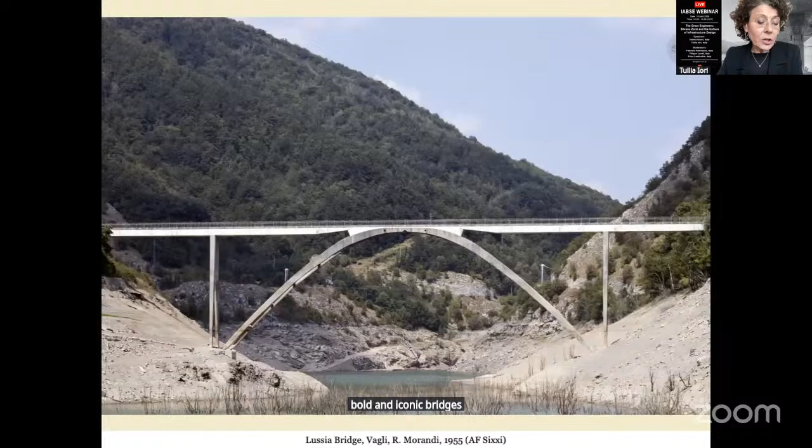At the beginning of the 1960s, the Italian School of Engineering was at the height of its success. Represented by designers such as Pier Luigi Nervi and Riccardo Morandi, it was recognized worldwide as a benchmark. Nervi's domes, classically beautiful, yet built with just a few centimeters of ferrocement, or Morandi's bold and iconic bridges, were featured in international technical journals and showcased in the famous 1964 New York exhibition dedicated to 20th century engineering, which was full of Italian works.

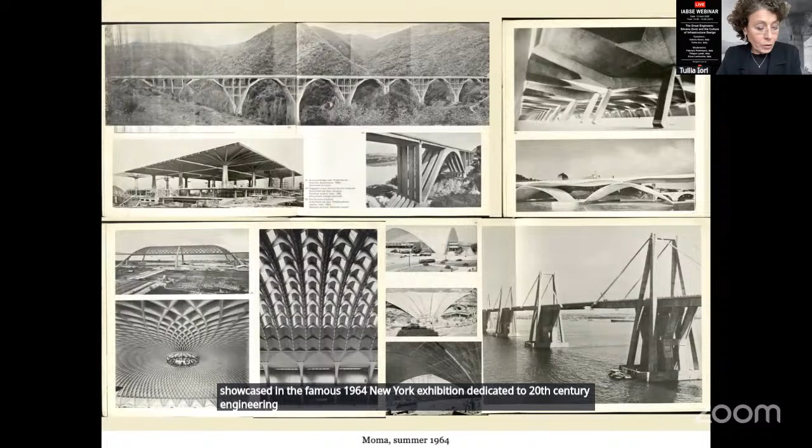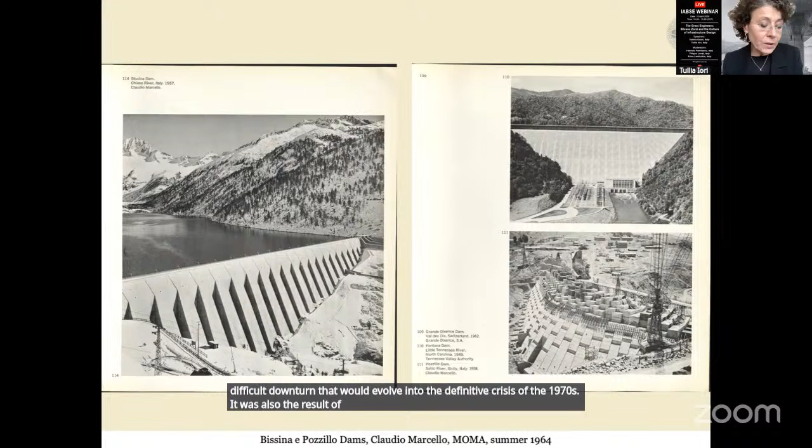After the mid-60s, however, this school disappeared from the radar. This was partly a consequence of the sudden change in Italy's productive conditions. From the extraordinary growth of the economic boom, the country fell into a difficult downturn that would evolve into the definitive crisis of the 1970s. It was also the result of a broader transformation in the civil engineering sector: rising labor costs, the advent of computing, changes in calculation tools, and increasing specialization led to the extinction of the classical figure of the large structure designer, which had survived in Italy's proto-industrial context.

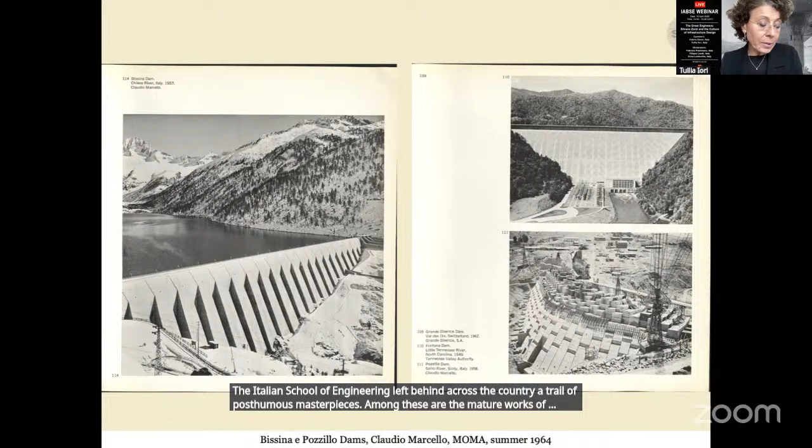From that moment on, even in Italy, bridges and large span structures would no longer be the individual work of a single author, but rather the depersonalized product of multidisciplinary teams and standardized construction systems. Yet, even in its rapid and irreversible decline, the Italian School of Engineering left behind across the country a trail of posthumous masterpieces. Among these are the mature works of Silvano Zorzi, who, after playing a leading role in the epic years of post-war reconstruction, remained one of the few to resist the extinction.

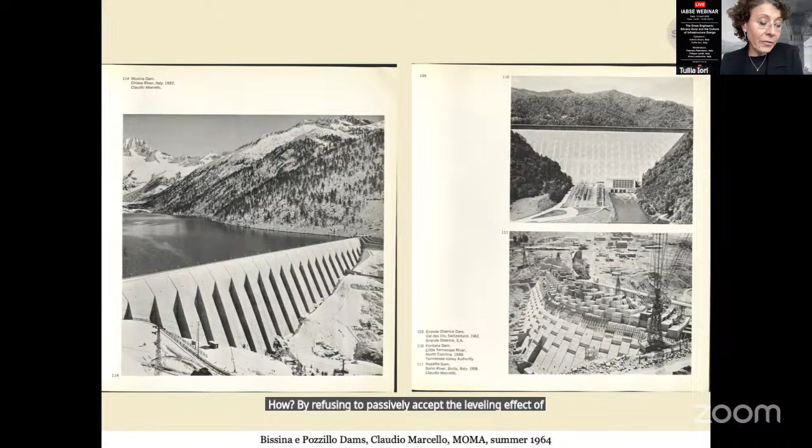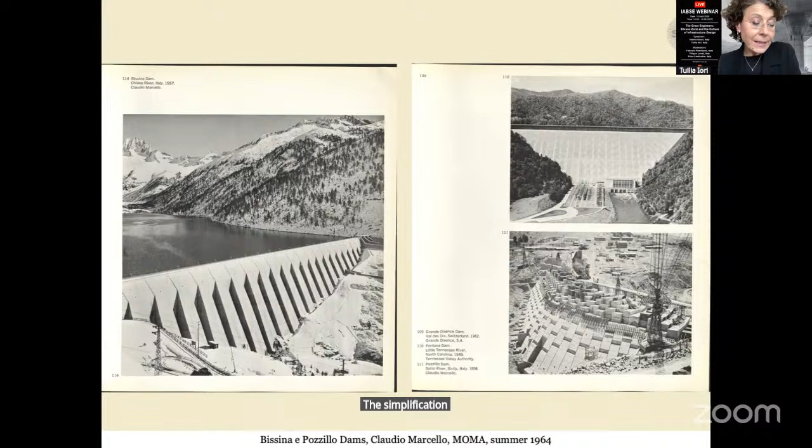How? By refusing to passively accept the leveling effect of specialization and prefabrication, by reworking innovative construction systems for Italian building sites, and by redeeming the simplification of structural schemes imposed by the changing production panorama through the quality of design. It was a kind of utopia, yet one capable of generating structural architectures of extraordinary quality.

Silvano Zorzi was one of the protagonists of 20th century Italian engineering alongside Pier Luigi Nervi, Morandi and Musmeci. A leading expert in prestressed reinforced concrete, he left behind a remarkable legacy of beautiful bridges throughout Italy. Zorzi was born in 1921. Nervi had been born 30 years earlier and Morandi nearly 20. These differences matter.

Zorzi worked entirely in the post-war period, actively participated in reconstruction, and rose to prominence during the economic boom. When the crisis arrived, he had to confront it directly. He was still young, and while the older engineers leveraged their careers abroad, Zorzi had to find a way to continue designing his masterpieces within Italy.

This masterpiece was created in a rapidly changing world of labor. At the beginning of his career, construction sites were full of workers who were inexpensive and needed employment. Public works also served to combat unemployment. These were labor-intensive sites with little machinery or technological equipment.

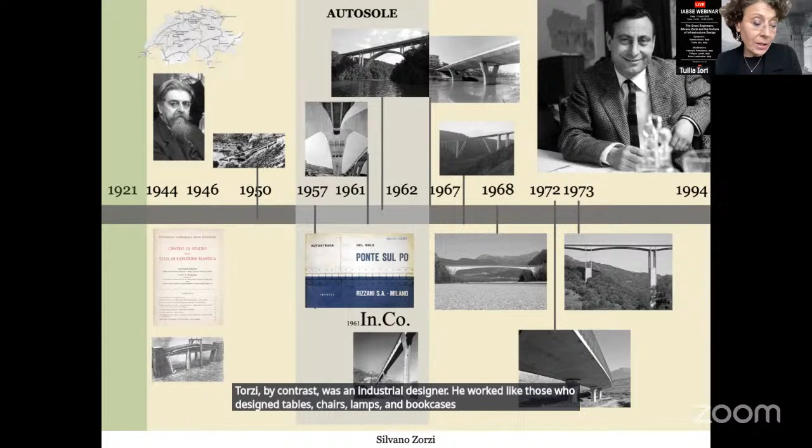Zorzi, by contrast, was an industrial designer. He worked like those who design tables, chairs, lamps, and bookcases for industrial production. And this is not surprising. A bridge is more like a table than a house. It's a functional object. Zorzi is a structural designer of Made in Italy, part of that legendary group of industrial designers who from Milan in the 70s rose to global preeminence.

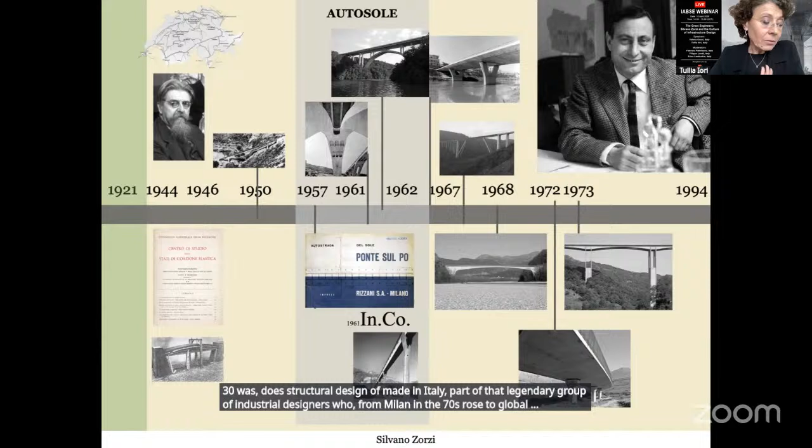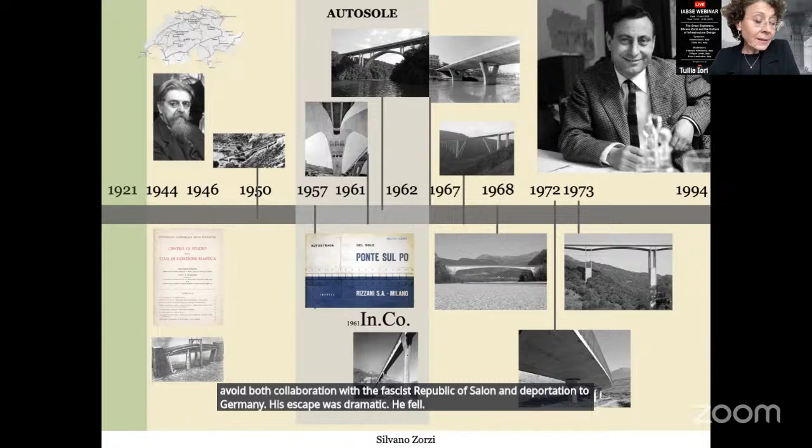Zorzi's beginnings were not easy. In 1939, he enrolled in engineering at the University of Padua, but with the outbreak of World War II, he was forced to abandon his studies. After the armistice of September 8, 1943, he fled to Switzerland to avoid both collaboration with the Fascist Republic of Salò and deportation to Germany. His escape was dramatic. He fell into a ravine, contracted septicemia, but eventually managed to cross the border.

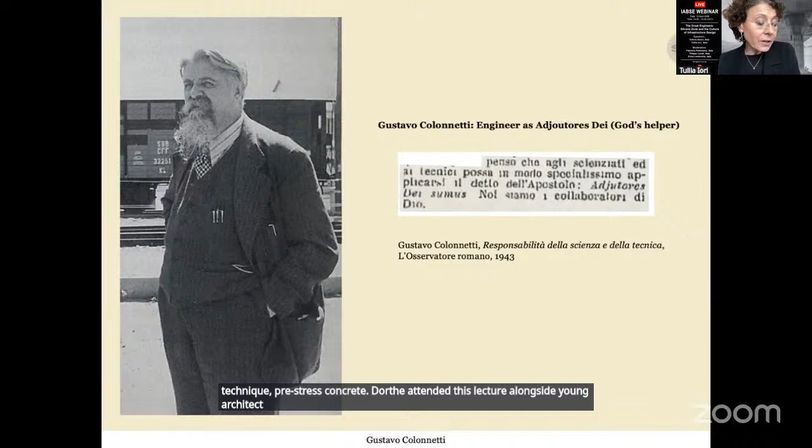In exile, a decisive encounter changed his life. He met Gustavo Colonnetti, also in Switzerland, a renowned anti-fascist and professor of structural mechanics at the Politecnico of Turin. Colonnetti organized university internment camps for refugee students, where he personally taught engineering courses focusing on an innovative technique, pre-stressed concrete. Zorzi attended these lectures alongside young architects and future leading figures in the Milanese industrial design world, such as Vico Magistretti and Angelo Mangiarotti, as well as Ernesto Nathan Rogers and Aldo Favini. They instilled in him a passion for the design of functional objects.

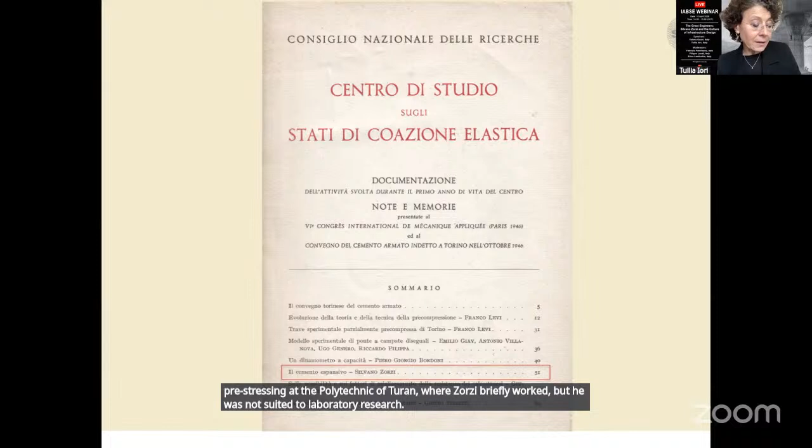Zorzi completed his exams in Switzerland, later recognized by the University of Padua as if he was in Erasmus. After the war, Colonnetti became president of the National Research Council and founded a research center on pre-stressing at the Politecnico of Turin, where Zorzi briefly worked. But he was not suited to laboratory research. He soon left to dedicate himself to bridge design. This Swiss experience shaped him permanently. Pre-stressed concrete and industrial design became the foundation of his thinking.

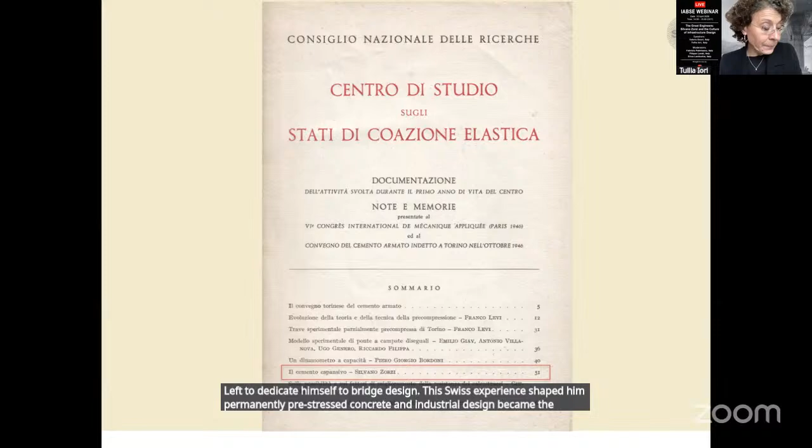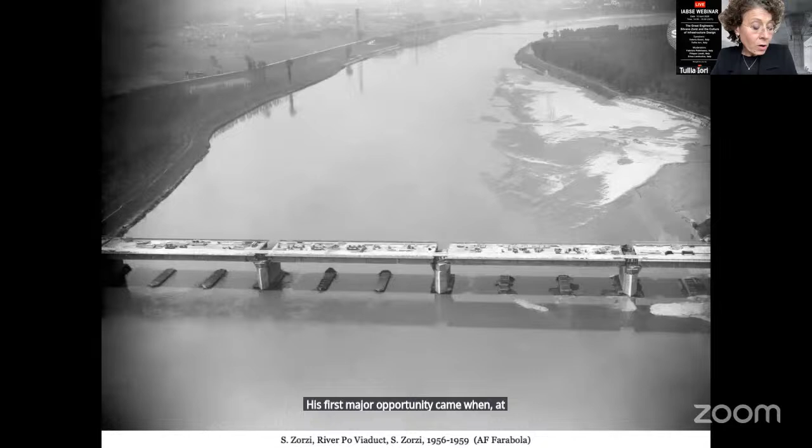Already in 1950, he designed one of the first pre-stressed concrete bridges in the world for the Mucone hydroelectric plant in Calabria. Shortly afterward, he opened his own design firm in Milan, later named INCO, Ingegneri Consulenti, Consultant Engineers. His first major opportunity came when, at age 35, he won the competition for a key bridge on the most important highway in Italy, the Autostrada del Sole, the Sun Highway. The bridge was over the Po River at Piacenza, completed in 1959. The bridge is a very simple structure, 16 pre-stressed concrete beams, simply supported on piers spaced 75 meters apart.

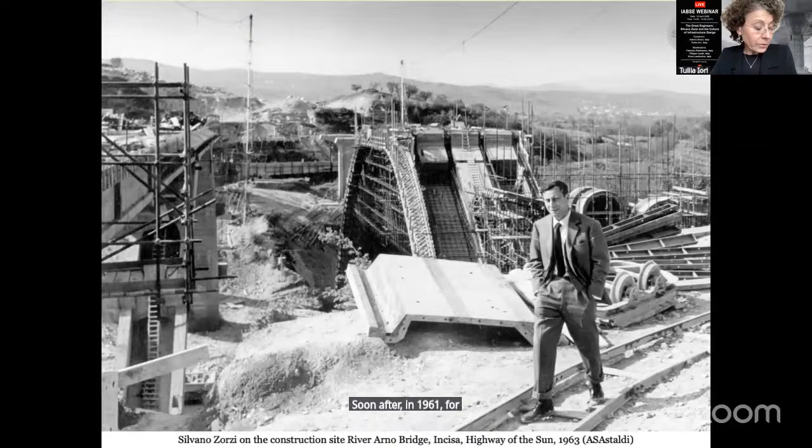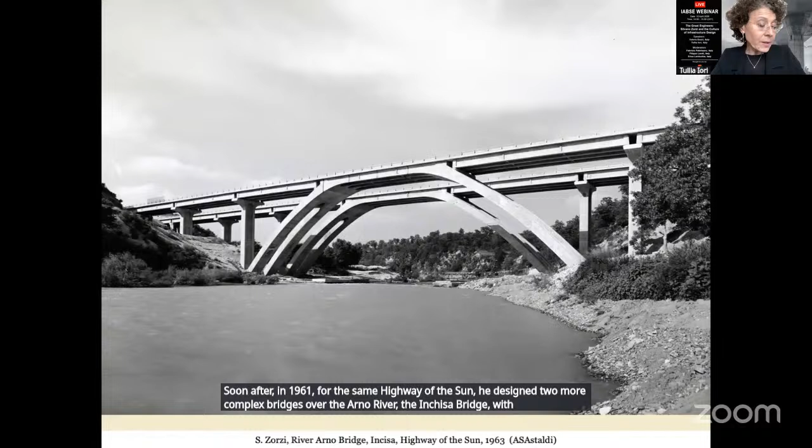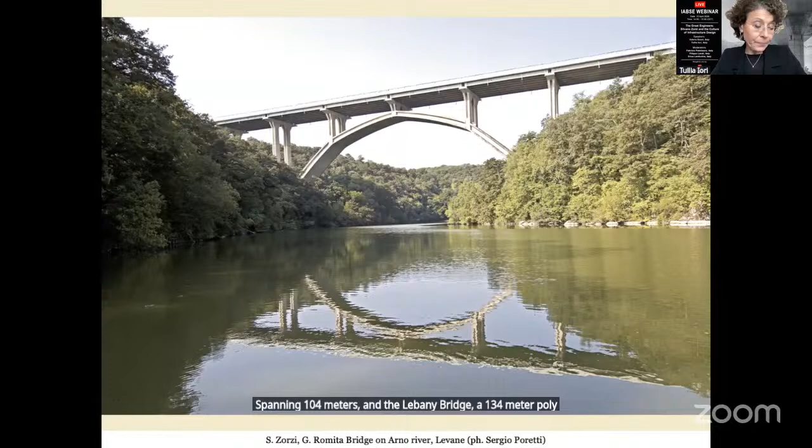Soon after, in 1961, for the same Highway of the Sun, he designed two more complex bridges over the Arno River, the Incisa Bridge, with twin pre-stressed concrete arch portals spanning 104 meters, and the Levane Bridge, a 134-meter polygonal arch, both built with a tubular scaffolding called Innocenti scaffolding.

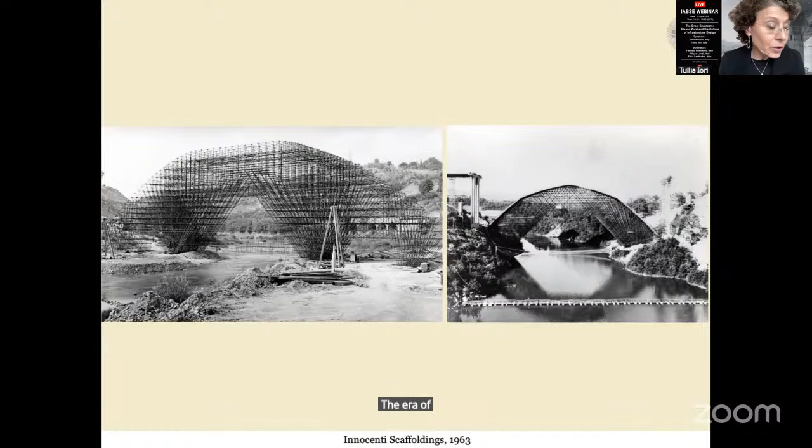The era of large arch bridges in Italy ended after the completion of the Highway of the Sun. After 1964, no such bridges were built for decades. New seismic regulations discouraged trussed structures like arches. Landscape authorities considered them too intrusive, and the cost of temporary scaffolding had become prohibitive. A new type of viaduct emerged, long straight decks supported by many tall piers, forming an abstract, almost invisible line in the sky. Zorzi initially, in fact, continued to design unique bridges.

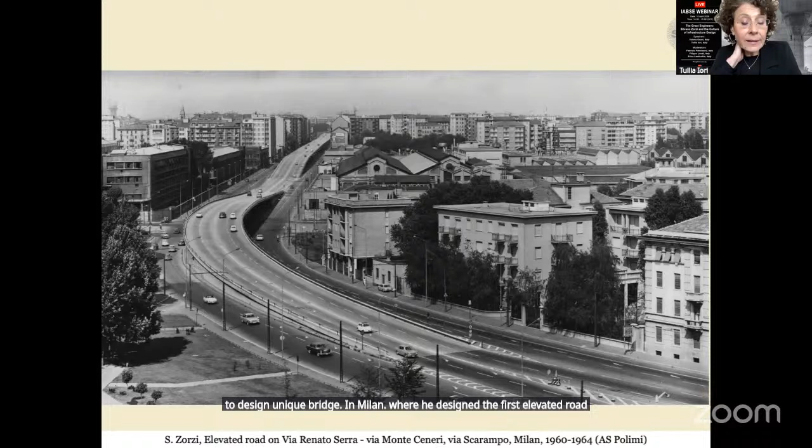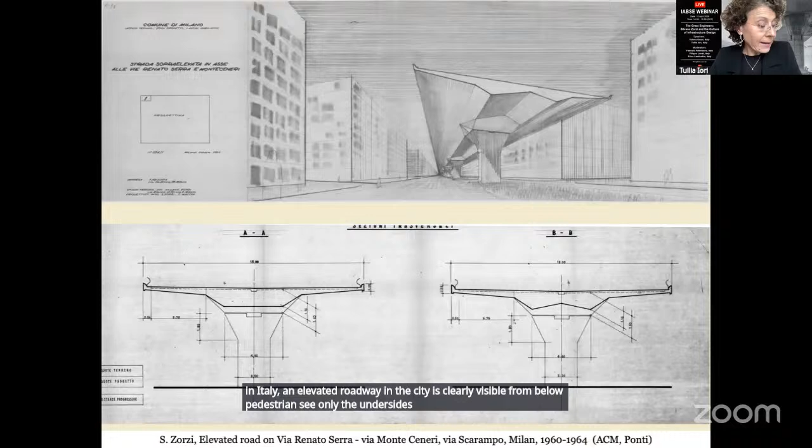In Milan, he designed the first elevated roadway in Italy. An elevated roadway in the city, he said, is clearly visible from below. Pedestrians see only the underside of the deck. Therefore, this underside must be carefully designed because it effectively becomes a kind of canopy for those walking beneath it.

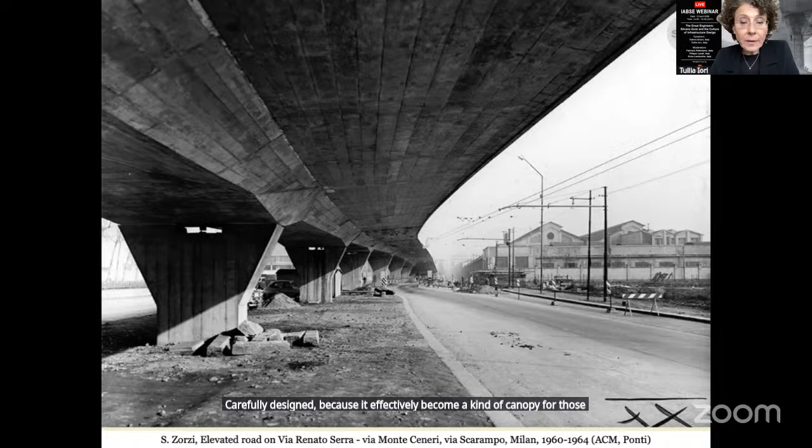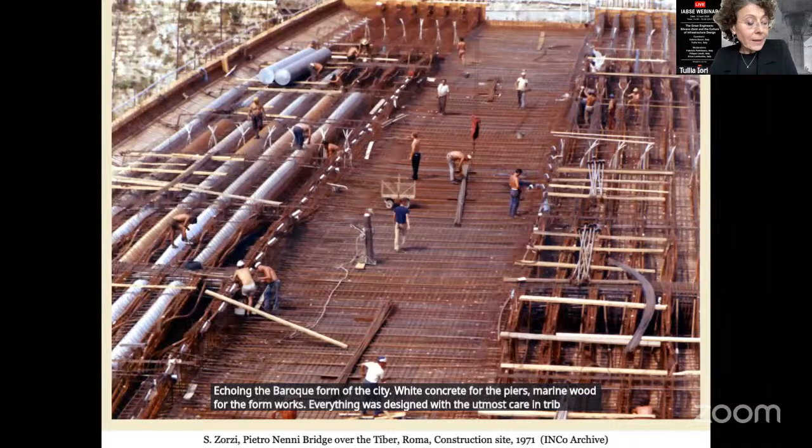In Rome, he designed the bridge carrying the metro line over the Tiber near Piazza del Popolo, completed in 1972. Slender bifurcated piers support a gently curved deck, echoing the Baroque form of the city. White concrete for the piers, marine wood for the formworks. Everything was designed with the utmost care in tribute to the capital and its historic river.

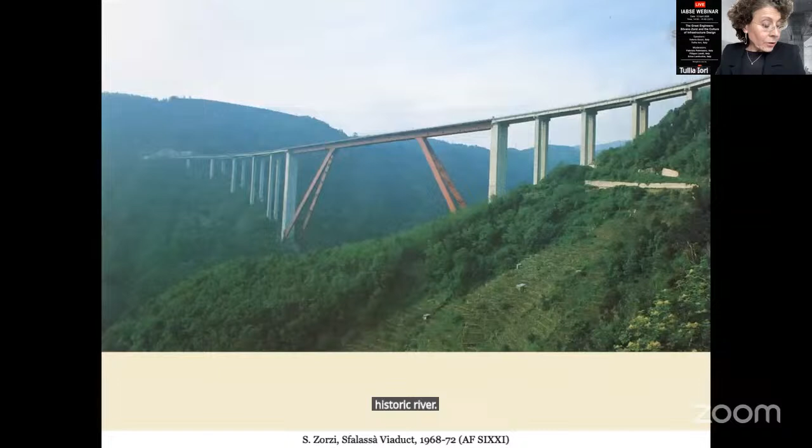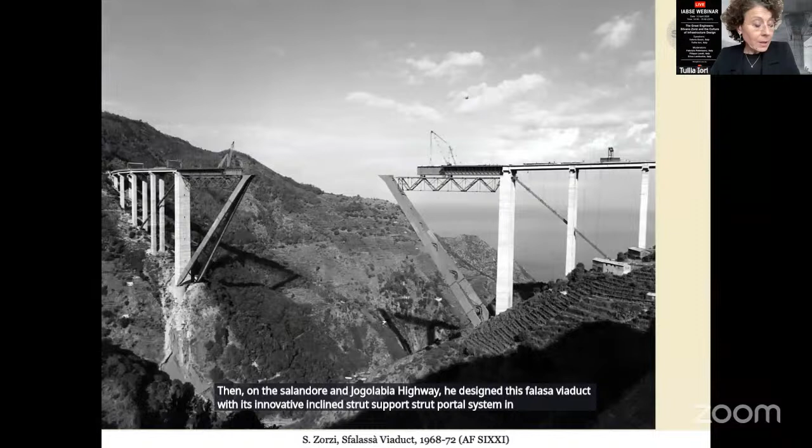On the Salerno-Reggio Calabria highway, he designed the Sfalassà viaduct with its innovative inclined strut portal system in steel. The struts were first constructed vertically and then rotated into position on site using a mechanical system. In this way, temporary supports were not required.

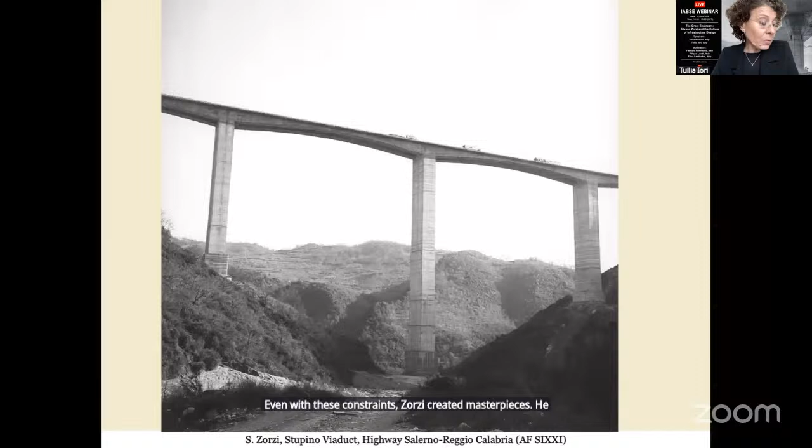But eventually, he too adopted the new typology of bridge: long, straight decks supported by many tall piers. Even with these constraints, Zorzi created masterpieces. He rationalized construction without abandoning cast-in-place concrete. He disliked prefabrication and instead invented a machine-site moving construction system that advanced along the bridge.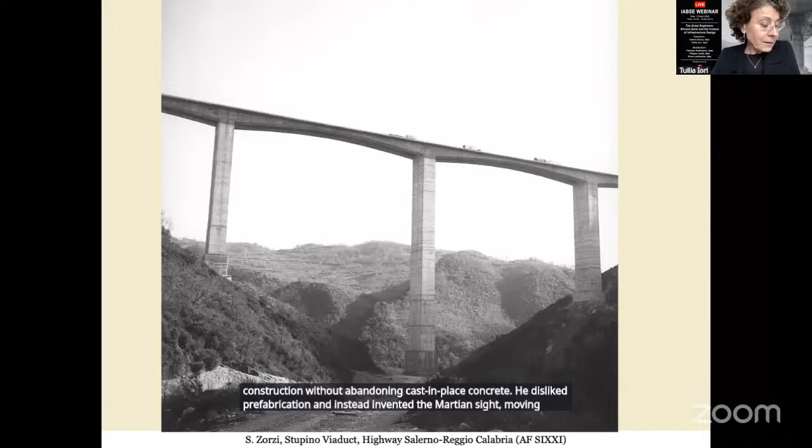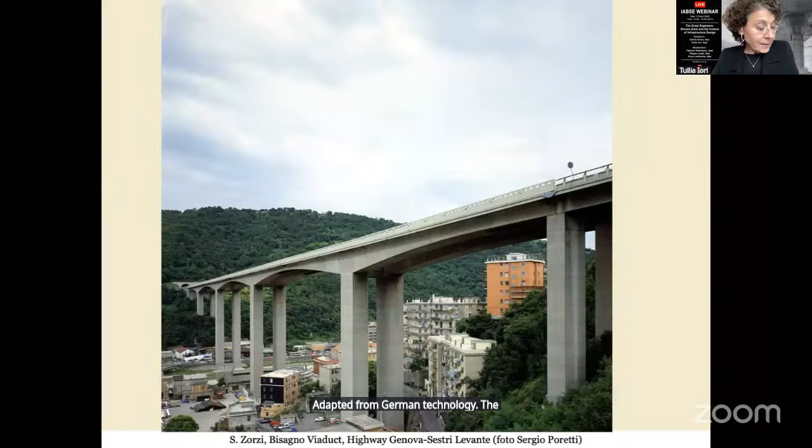He introduced two key machines in Italy adapted from German technology. The first is the self-launching centering system, which Valeria Gozzi will describe in detail. Using this machine, Zorzi built very long viaducts, such as the Parchi Viaduct east of Milan, which is a very beautiful viaduct, now a little bit transformed.

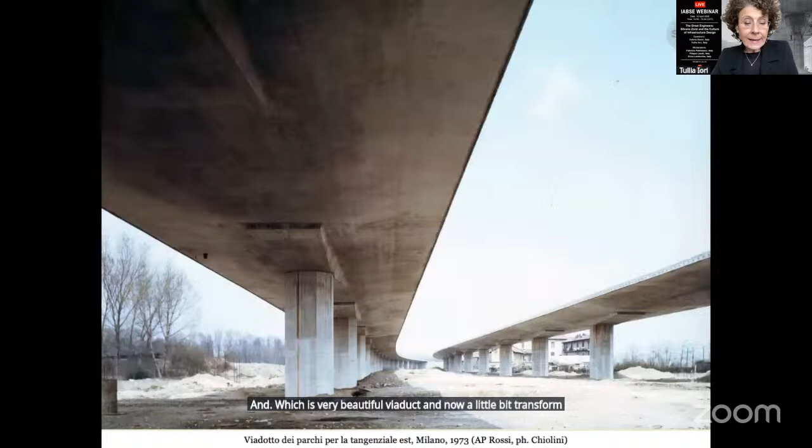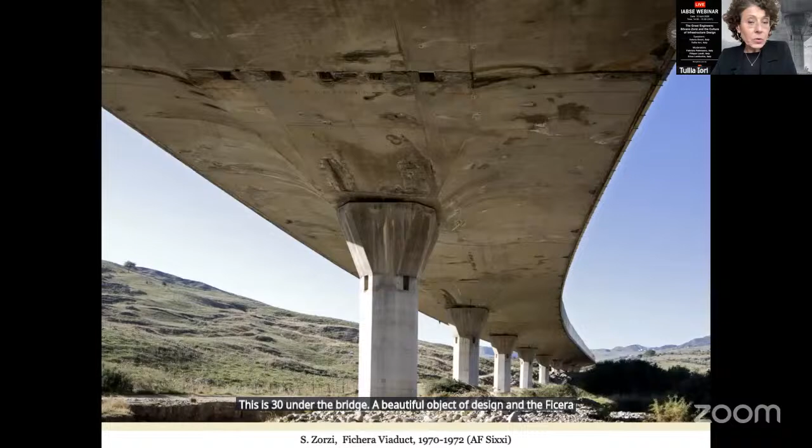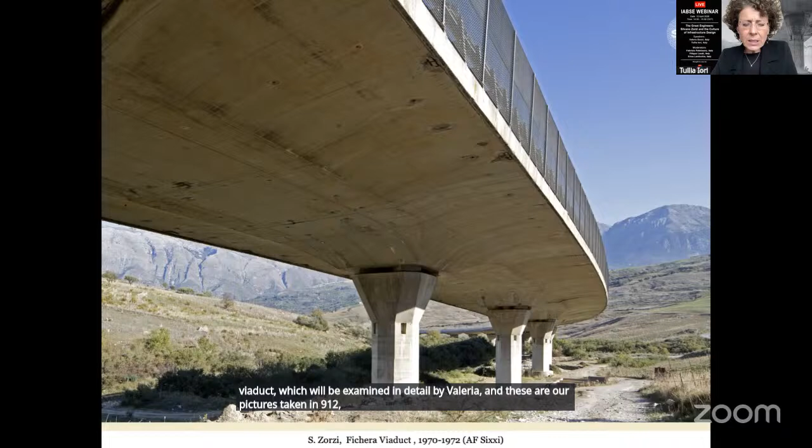This is Zorzi under the bridge, a beautiful object of design, and the Fichera Viaduct, which will be examined in detail by Valeria. And these are our pictures taken in 2015.

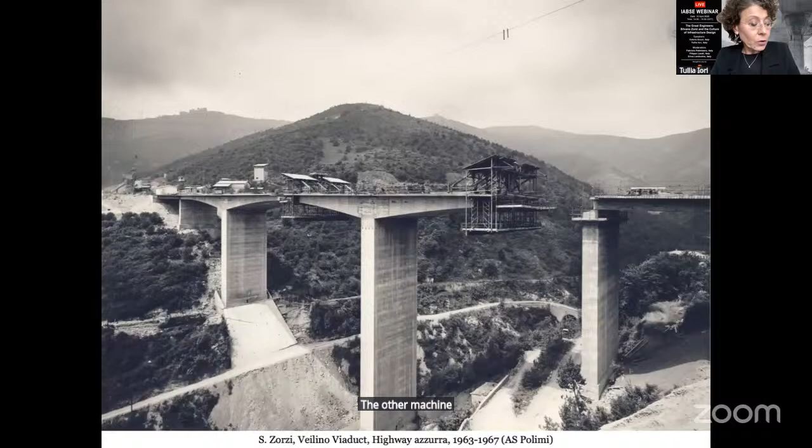The other machine that Zorzi introduced to Italy is the movable form traveller for incremental and step-by-step construction. This machine was used to build the viaduct starting from the top of the pier and proceeding in cantilever. The device extended outward, allowing construction of a deck segment about 4 meters long, also in cantilever. To avoid deforming the pier, the deck was built symmetrically on both sides. Construction advanced little by little until the two cantilevers eventually met.

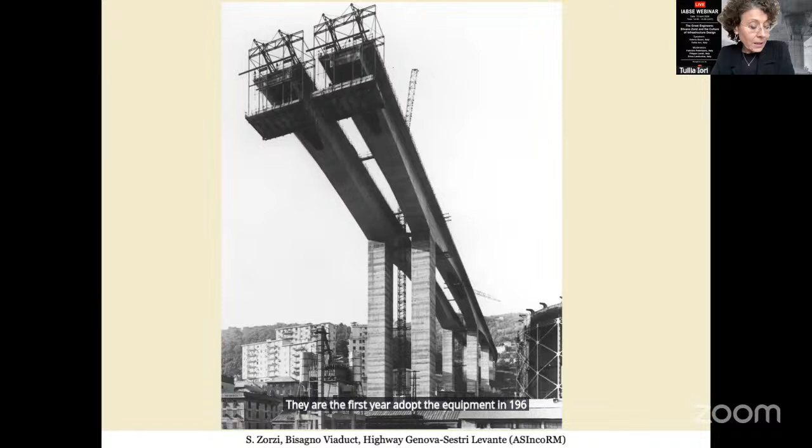Zorzi first adopted the equipment in 1963 for a series of viaducts along the Blue Highway, the Autostrada Azzurra, in Liguria from Genoa to Rapallo. Zorzi then designed the bridge over the Tagliamento River at Pinzano, built by the Rizzani Company.

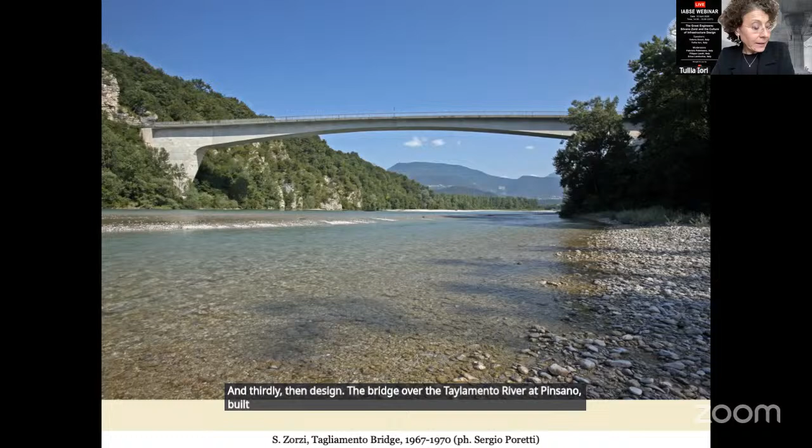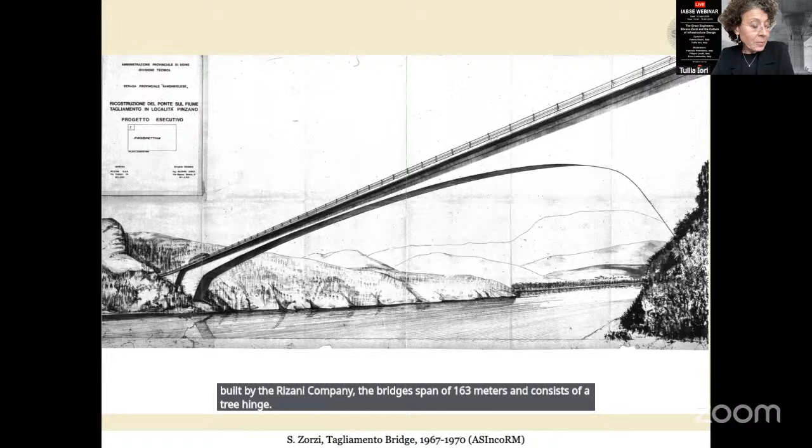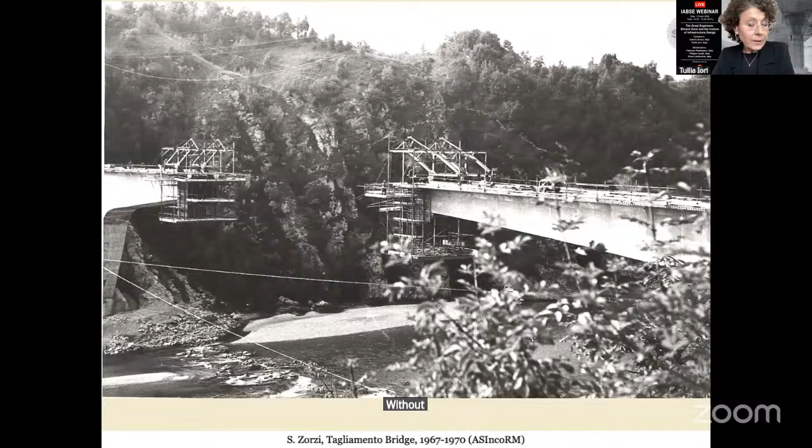The bridge has a span of 163 meters and consists of a 3-hinge portal frame in pre-stressed reinforced concrete. The structure was built in cantilever from both banks. The hinges at the abutments were temporarily locked by inserting deep anchor rods into the rock. Segment by segment, the two cantilevers advanced until they met at the crown without bending, thanks to temporary pre-stressing.

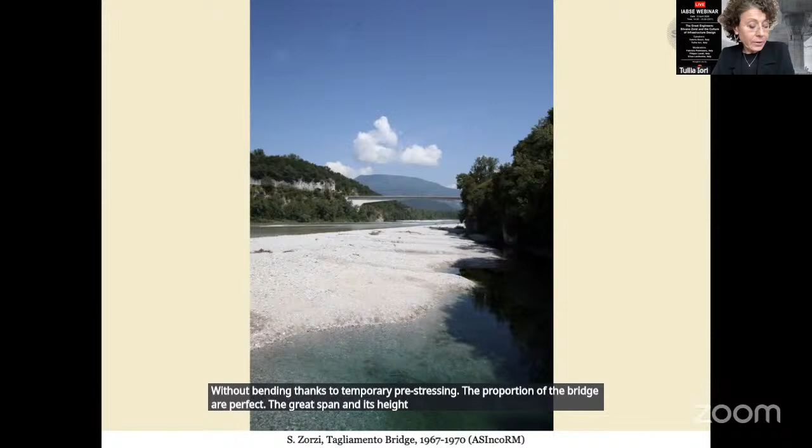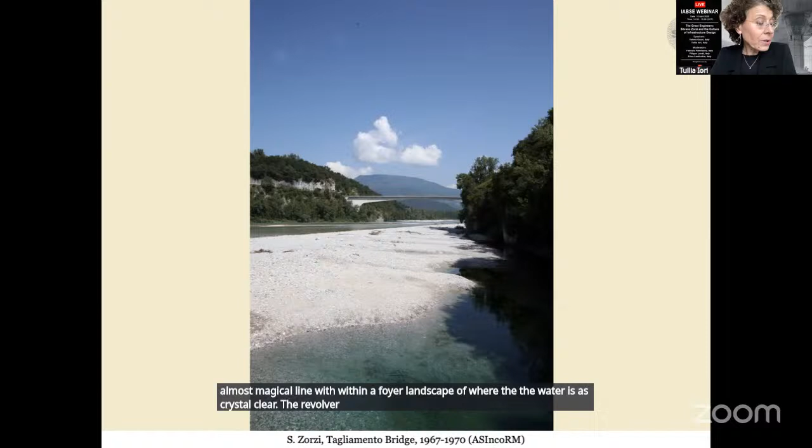The proportions of the bridge are perfect. The great span and its height above the water detach the structure from any direct relationship with human scale. The bridge appears as a slender, almost magical line within a fairy tale landscape where the water is crystal clear, the river has a pinkish hue, and the Dolomites rise in the background.

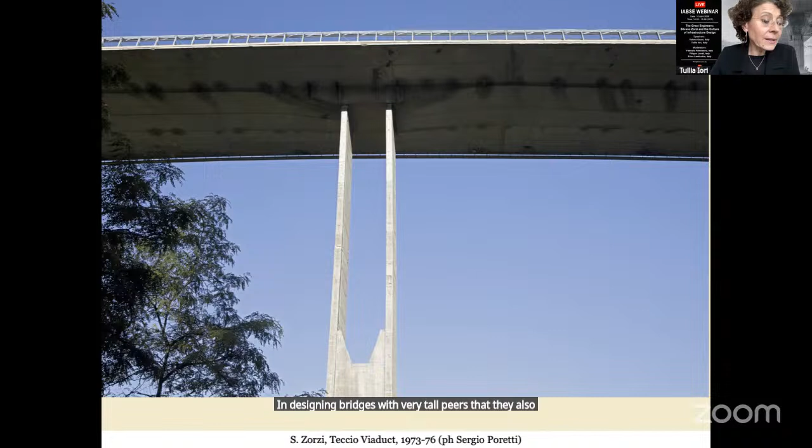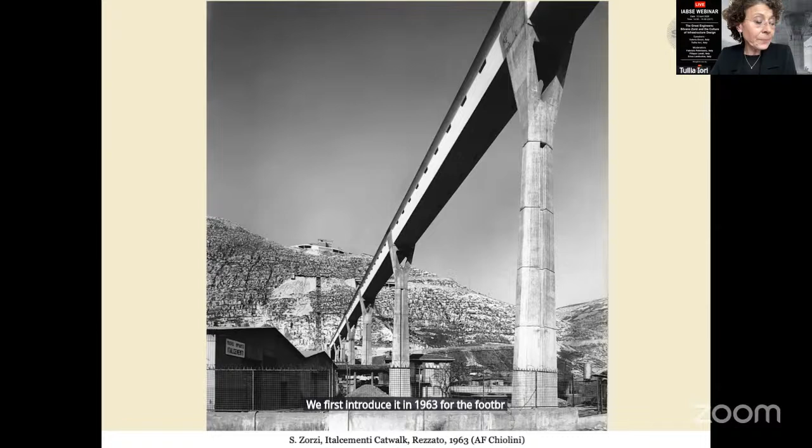In designing bridges with very tall piers, Zorzi also developed an original structural solution, the tuning fork piers. He first introduced it in 1963 for the footbridge at the Italcementi plant in Rezzato. It's not really a footbridge, but a bridge for technical things.

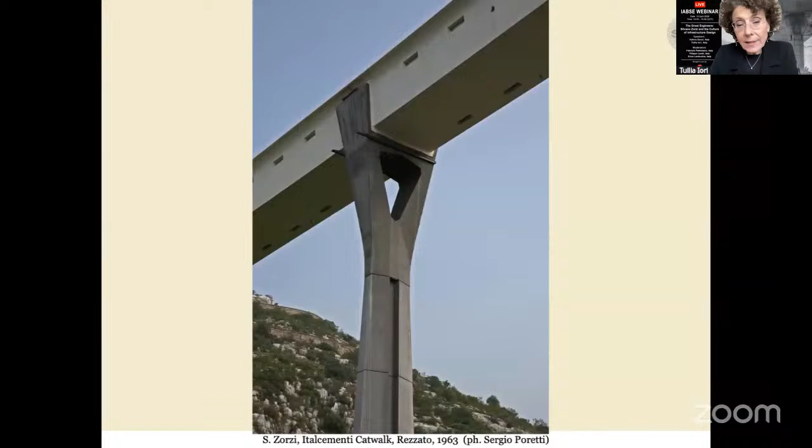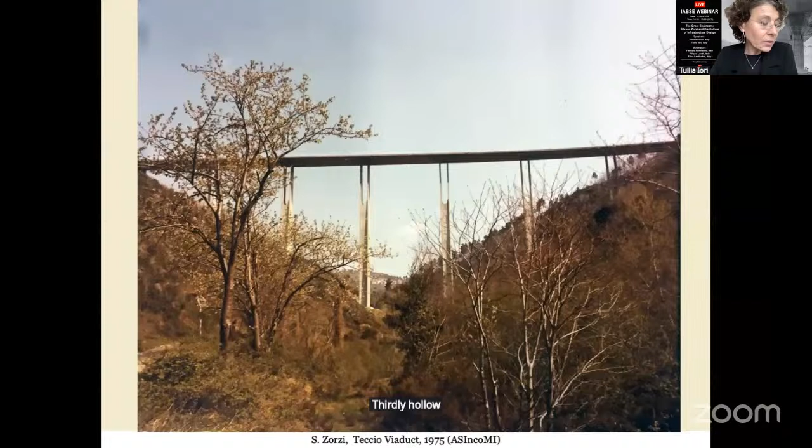This is another industrial design object, later refined in the Gorzexio and Teccio viaducts in Liguria. Zorzi hollowed out the top of the piers, leaving only two parallel blades. The piers resemble a tuning fork.

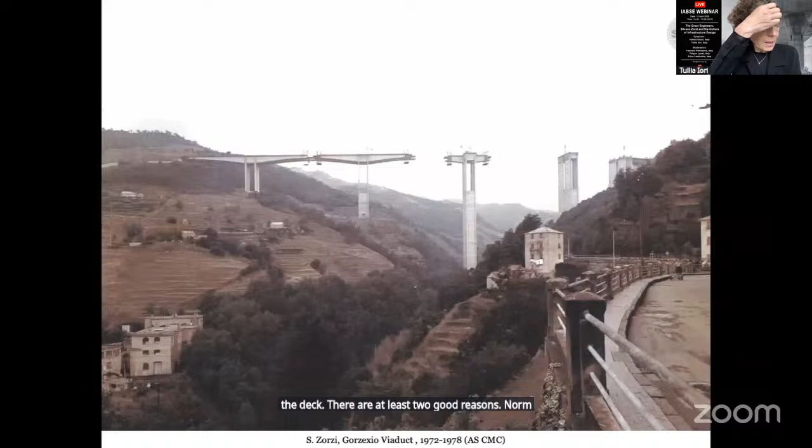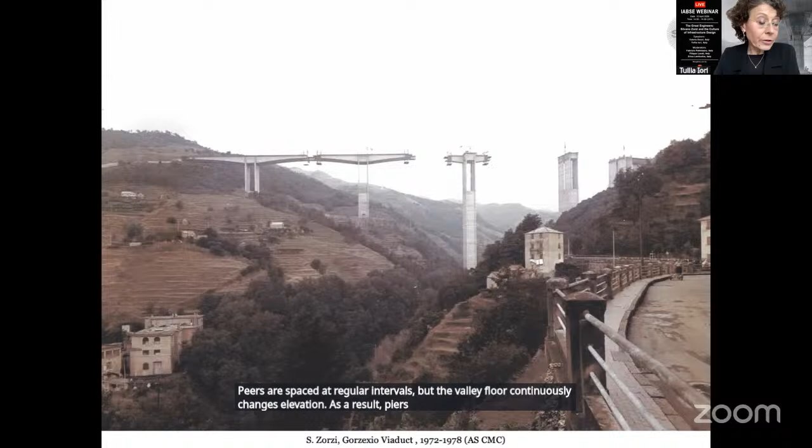Why did he remove material precisely at the most delicate point of the bridge, where the piers meet the deck? There are at least two good reasons. Normally, piers are spaced at regular intervals, but the valley floor continuously changes elevation. As a result, piers have different heights and therefore different structural behaviors. A tall, slender pier behaves differently from a short, stocky one.

If, however, the upper portion of each pier is identical, with lower stiffness than the base, the viaduct behaves as if it effectively begins at that level. The lower part simply acts as a foundation. In this way, Zorzi achieved a more uniform distribution of stresses across all the piers, making them structurally equivalent.

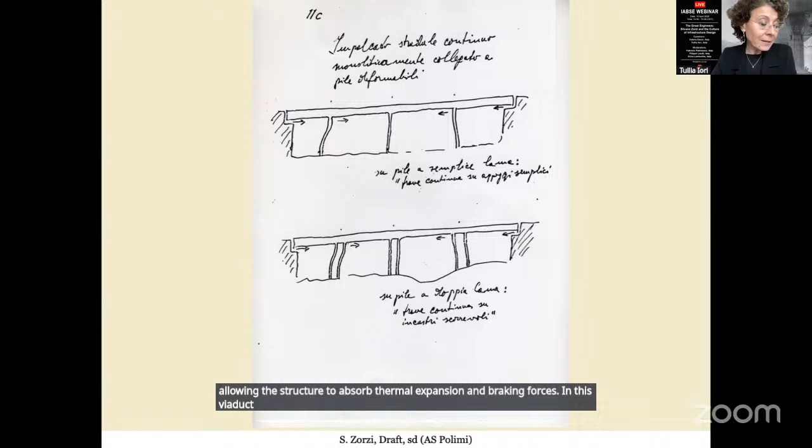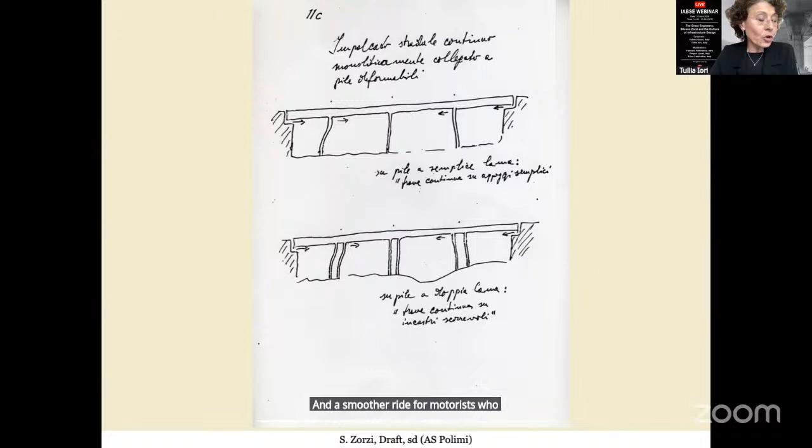But that is not all. The tuning fork shape accommodates horizontal forces, allowing the structure to absorb thermal expansion and braking forces. In these viaducts, expansion joints in the deck are no longer necessary, resulting in significant cost savings and a smoother ride for motorists who no longer experience jolts at every joint.

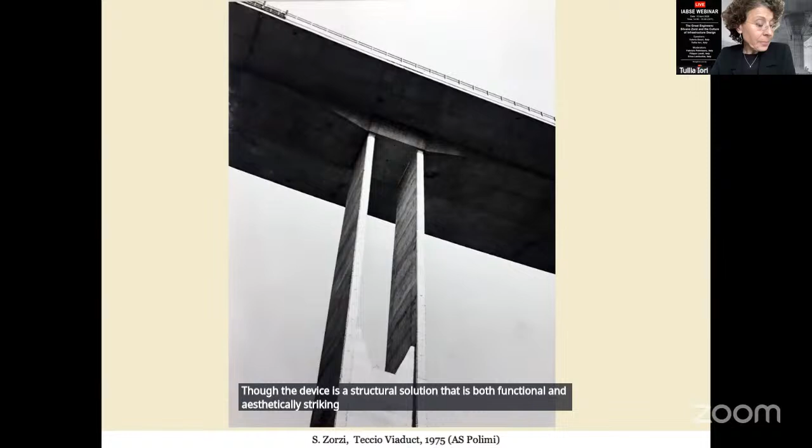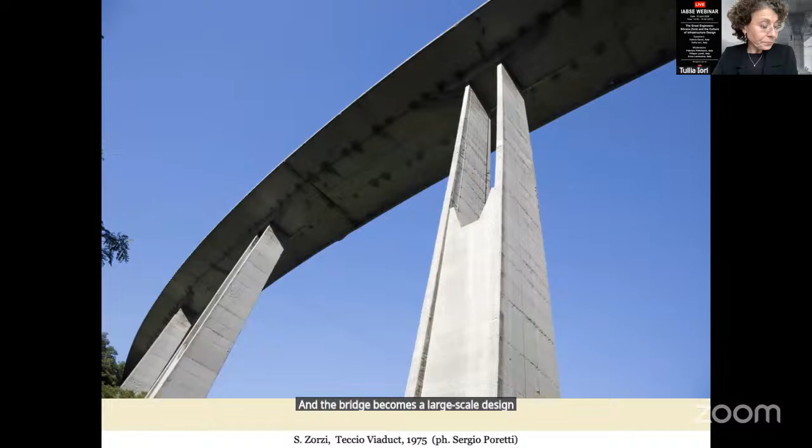Zorzi devised a structural solution that is both functional and aesthetically striking. The pier becomes transparent at the top, and the deck appears even lighter, and the bridge becomes a large-scale design object. Despite his efforts, by the middle 70s, Italian engineering entered an irreversible crisis.

Competitions based on technical merit became increasingly rare, and Zorzi often complained about this new climate. He continued working stubbornly until the late 80s. After falling ill, he passed away on March 13, 1994.

Zorzi left behind him a legacy of structural design works across Italy, an extraordinary heritage that deserves to be preserved.

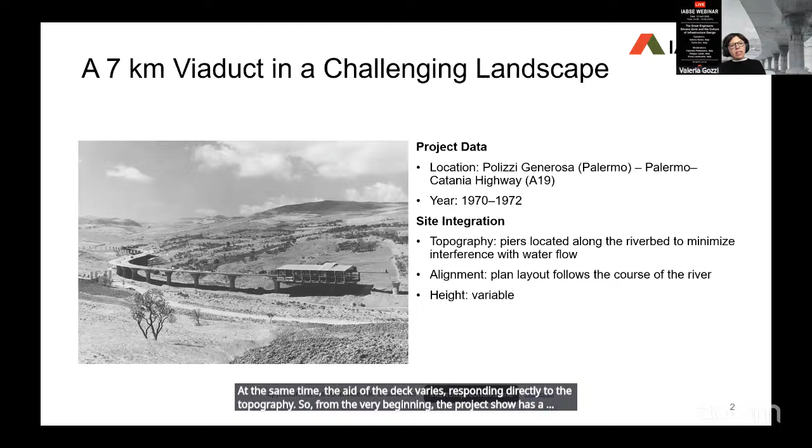If we look at the geometry of the viaduct, what immediately stands out is its strong regularity. The viaduct is about 7 kilometers long and made up of 199 spans of around 35 meters, with slightly shorter spans at the ends. The deck has a constant width of 22 meters, but its depth varies significantly along the span. It is much thinner at mid-span and deeper over the supports.

The structure in this way works as a continuous system made of a sequence of repeated portal frames and conceived as a hyperstatic system. The deck is made of pre-stressed concrete cast in place and designed to ensure an almost uninterrupted continuity. The expansion joints are reduced to a minimum and placed at alternating spans, approximately every 70 meters, at a location where the bending moments due to permanent loads are almost zero. They are realized through steel neoprene sandwich elements integrated with a shear connection in the form of dowel bars. This allows the structure to maintain continuity while controlling deformation and thermal effect. As a result, the deck behaves almost as a single continuous element, improving both structural efficiency and durability. This continuity also allows the deck to act as a horizontal bracing system for the sequence of piers. So the deck is not only a load-bearing element, but also plays a key role in the global stability of the structure.

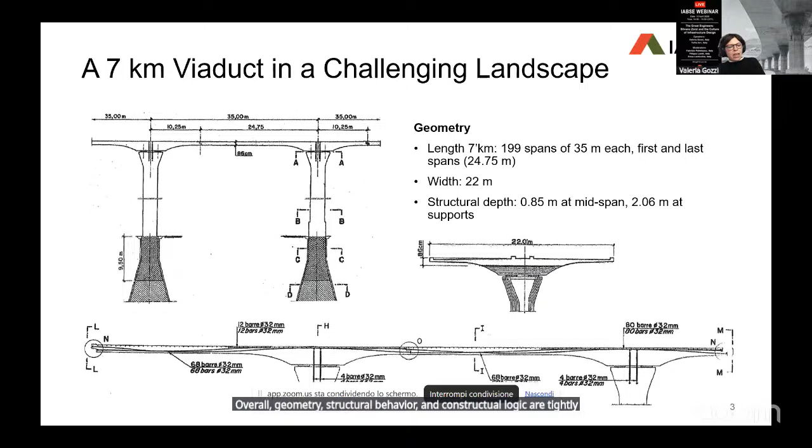Overall, geometry, structural behavior, and construction logic are tightly connected and already point towards the importance of the construction process.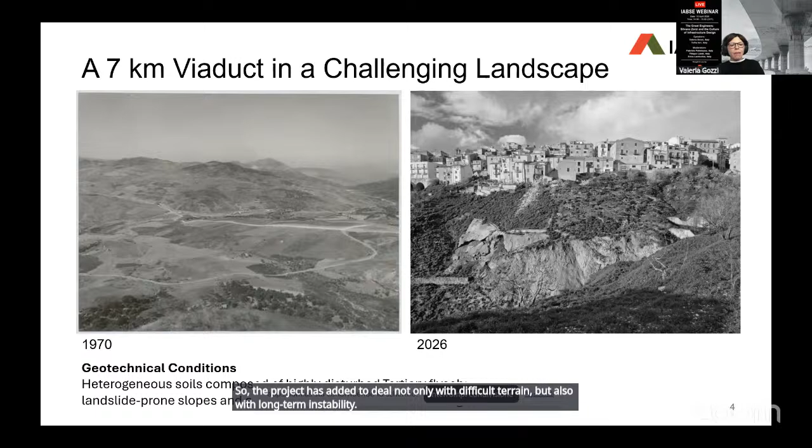If we look at the geological risk map, the latest one, here we see the viaduct position. We can see that the landslides tend to converge towards the riverbed, exactly in correspondence of the viaduct. This means that the slopes on both sides are unstable and their movements are directed toward the central valley. This condition is crucial for understanding the design strategy.

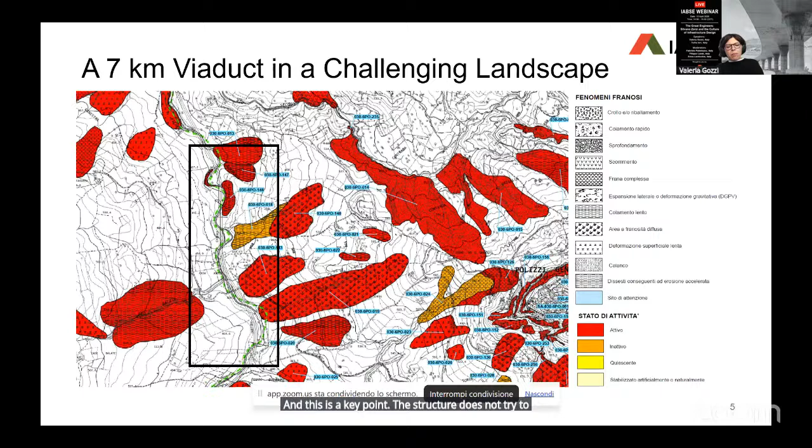At first glance, one might expect the structure to avoid this area, but Zorzi does exactly the opposite. Instead of placing the foundation on unstable slopes, the piers are located along the riverbed, where the ground conditions are more stable due to the mutual constraint of opposite movements. So the riverbed is not seen as a constraint, but as the only possible line of stability. In this way, the position of the piers is not only a geometric or hydraulic choice, but a direct response to the geotechnical condition, and this is a key point. The structure does not try to resist the terrain, but rather adapts to its behavior.

If we look at the alignment, comparing these photos before the structure and then during construction, we can clearly see how the viaduct develops along the riverbed. The geometry is then not linear, but follows the natural curvature of the valley. The span repeats, but the overall path adapts continuously to the landscape. So what we see here is a structure that is both regular and flexible: regular in its structural system, but adaptable in its alignment. And as already said, the riverbed becomes the line of stability.

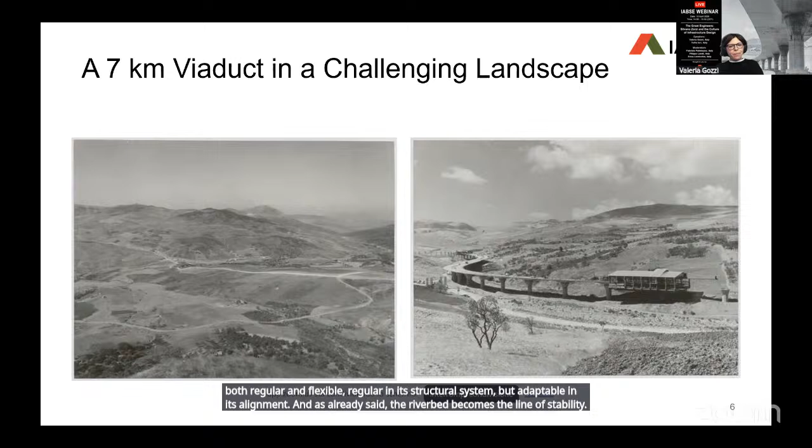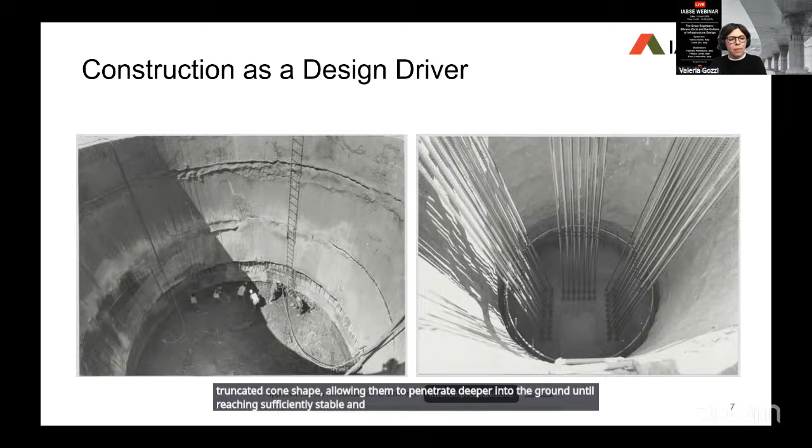Here, some photos from the foundation. Given the hydrogeological condition we have seen, the foundation system is designed to reach stable ground layers. The foundation consists of a series of deep foundation wells aligned along the axis of the deck. These wells are enlarged with a truncated cone shape, allowing them to penetrate deeper into the ground until reaching sufficiently stable and resistant layers. Above them, piers rise as relatively slender elements with an octagonal section and reduced footprint.

At the same time, vertical pre-stressing, which can be seen here, is introduced both in the foundation wells and in the piers. This is intended to improve the structural response to shear forces and bending moments, especially those induced by possible ground movements. So the foundation system is not only designed to carry vertical loads, but also to respond to an unstable and evolving ground condition.

At the top of the piers, the geometry changes significantly. The piers widen into mushroom-shaped capitals, which provide a larger surface for load transfer from the deck. The deck is not rigidly connected to the piers. Instead, it rests on neoprene bearings, which allow controlled movements and accommodate thermal effects and deformation. So the connection between deck and pier is not fixed, but intentionally flexible. This avoids stress concentration and allows the structure to adapt to both structural and ground movements.

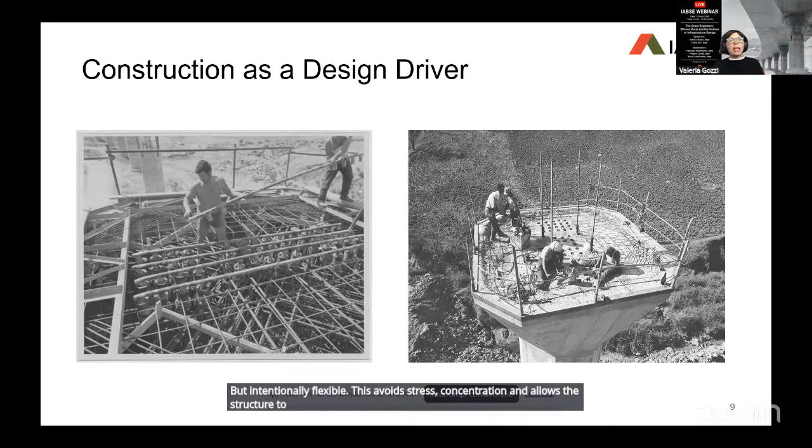Here, the 4 neoprene bearings. The decks rest on 4 reinforced neoprene bearings arranged at the corners of a square. Within this square, the resultant of vertical loads always falls, ensuring a stable and controlled transmission of forces. This creates a connection that is not rigid, but able to behave as a sort of hinge between deck and piers.

This is particularly interesting, in my point of view: the system is also designed to allow future adjustment. In fact, in case of foundation settlement, the structure can be re-leveled by inserting flat jacks in this position between the piers and the deck. So the connection is not only flexible, but also adaptable over time.

In this picture, we see an original image of how Zorzi built the deck.

As already anticipated by Professor Tullia Iori, Zorzi was not only a structural engineer, but also a technologist, as we can say today, and a builder. For him, construction was never a secondary phase, but something strictly connected to the structural system and to the form of the project itself. Bridge construction can rely on different methods, as the Professor cited before: traditional cast in place, prefabrication, balanced cantilever construction, each suitable for specific conditions.

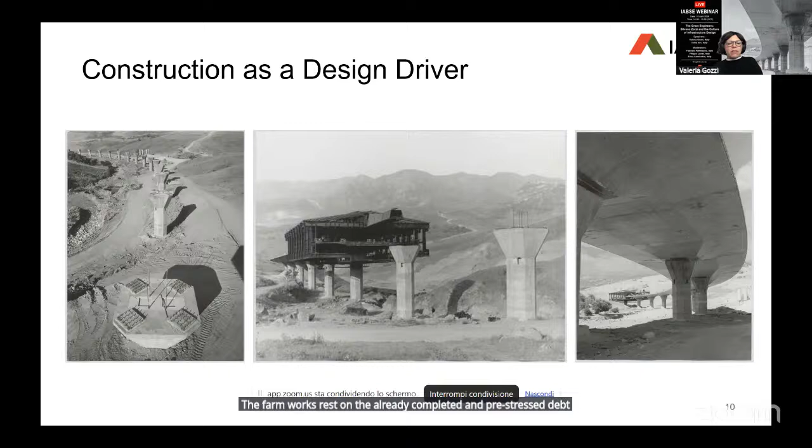What is particularly interesting is how the system actually works. The formworks rest on the already completed and pre-stressed deck and advance forwards in cantilever towards the next piers. In that way, the system behaves as a true mobile workshop, as you can see in this picture, operating directly on the structure itself. Each construction phase is fully mechanized, and the process is repeated span by span.

The construction follows a constant rhythm, with an average of 1 span per week in the case of the Fichera Bridge, corresponding to about 770 square meters of deck. So the bridge is not built from the ground, but progresses along itself, with the construction system moving forwards as the structure is completed.

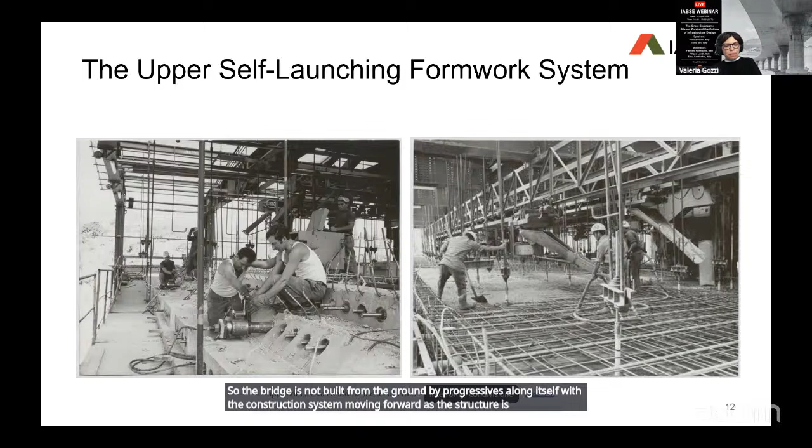So, to conclude, what the Viadotto Fichera really demonstrates, from my point of view, is that for Zorzi, design is never just about structure, but about bringing together landscape, structural logic, form, and construction strategies into a single coherent system. The geometry is never arbitrary, but driven by efficiency. The structure is not isolated, but embedded in the territory. And the construction is not a phase that comes later, but something that shapes the project from the beginning.

In this sense, Zorzi's works remain deeply contemporary, a forward-thinking and truly multidisciplinary approach to engineering.

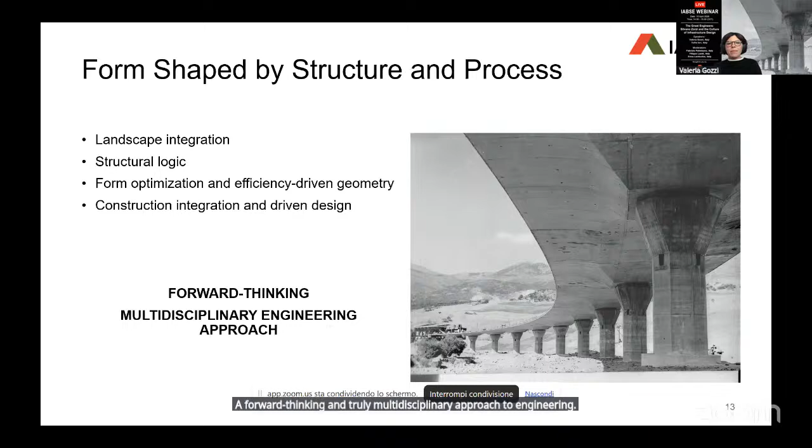Thank you very much. Here I have also a few references that I've used for this presentation. I don't know if you want to share.

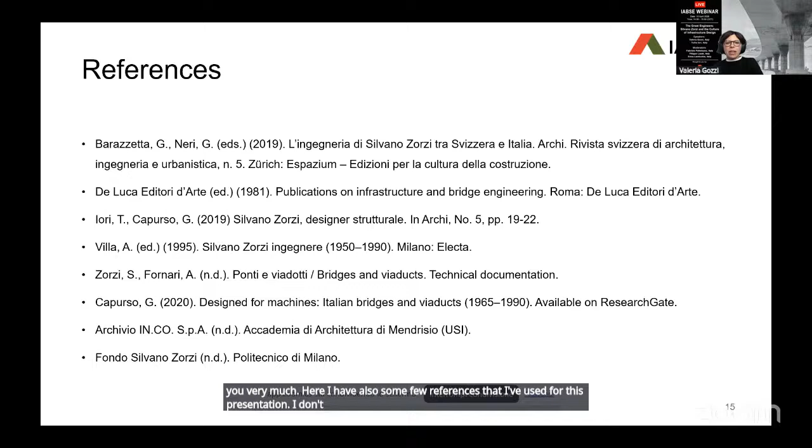Thank you. Thank you, Valeria, and thank you, Professor, for your wonderful presentations. They're very interesting. And maybe you can stop sharing the screen. I don't know, Valeria, if you are still sharing it. Okay, perfect.

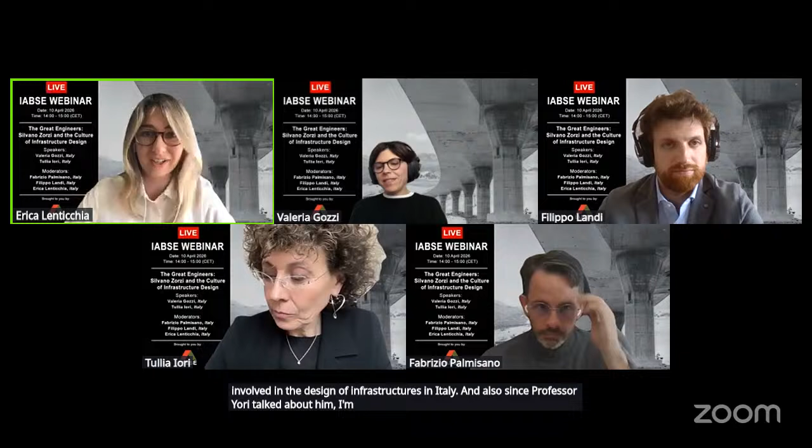While we are waiting for some questions from the public, I would like to ask one question first. Since this is our second webinar, and we talked also about another great engineer who was involved in the design of infrastructures in Italy, and since Professor Iori talked about him, I'm referring to Riccardo Morandi, who was the focus of our first webinar. I'd like to ask both of you,

which are the main affinities between these two figures, Silvano Zorzi and Riccardo Morandi, and not just their affinities, but also their key differences, how they approached the design of these wonderful infrastructures that shaped our landscape. Thank you.

You start, Tullia. Yeah, and Morandi was another generation of engineer, because he was not formed in pre-stressed reinforced concrete. He started to experience this way of construction during World War II, like the others, but it was an experimentation for him, not really something theoretical or something in the school. But they are in the same line, in fact, because they have the same heroes to refer to, because both of them are so linked to Gustavo Colonnetti.

And Gustavo Colonnetti said something very special for the engineer. He said that the engineer is God's helper. God's helper means that the engineer has to do something to help nature produce something better than it is used to. So you can be an engineer forcing nature a little bit and trying to improve nature to do something more. And this is so different from Pier Luigi Nervi and the other naturalist engineers like Sergio Musmeci.